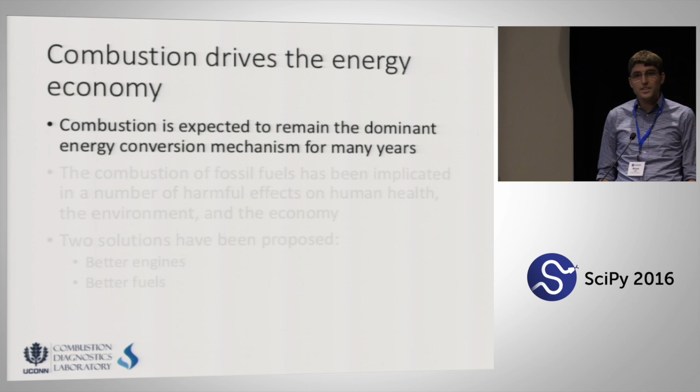So as a little bit of motivation, combustion really drives our energy economy. And to put some numbers to the pie chart that Kyle showed before, this is a bar graph with data from the EIA, the federal agency, the Energy Information Administration. And the blue bars are data from 2013, and the orange bars are projections out to 2040. And the first three categories there, petroleum, natural gas, and coal, are all combustion. So you can see that that makes up that 85% number that was mentioned before.

And even out to 2040, and these projections might have shifted a little bit. I think 2013 was just at the very start of the natural gas boom. So these projections might have shifted a little bit by now. But even all the way out to 2040, there's still a huge dependence on combustion as an energy conversion method. And I'd also like to point out that combustion can also be used renewably a little bit, especially if we use something like biomass to do the combustion. So then we can have a net zero gain in something like carbon dioxide over the life cycle of growing a plant, making the fuel out of it, and then burning it at the end.

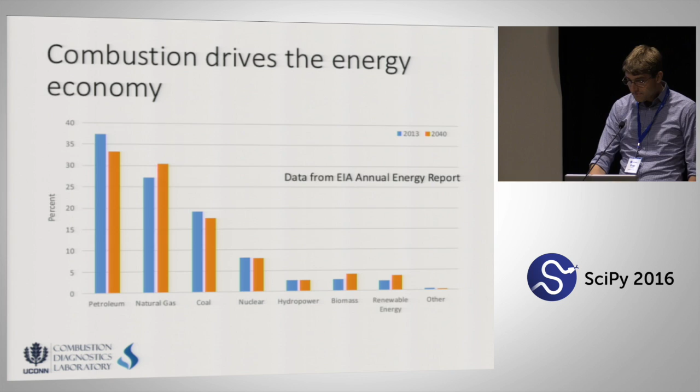That said, most of what we use right now is that petroleum, natural gas, coal, and the combustion of these fossil fuels is really not very good for us, for our health, for the environment in general, and even for the economy. Wild swings in the price of oil that we saw, I think, last year really affected a lot of companies. So we have two ways to get around using these fossil fuels, or at least ameliorating some of the difficulties that we have with them. We can design better engines, and we can design better fuels.

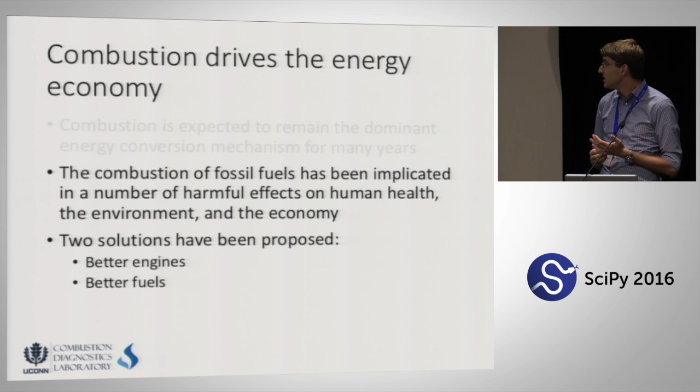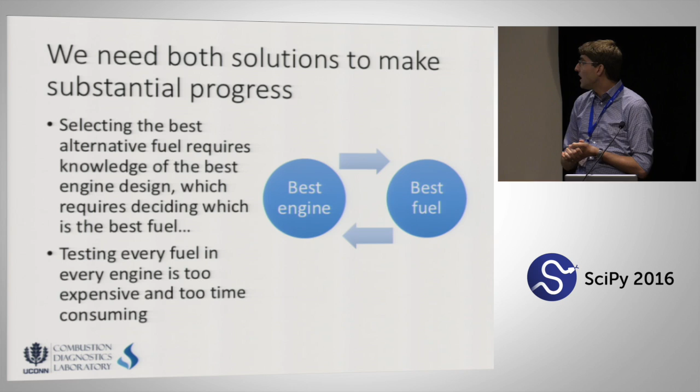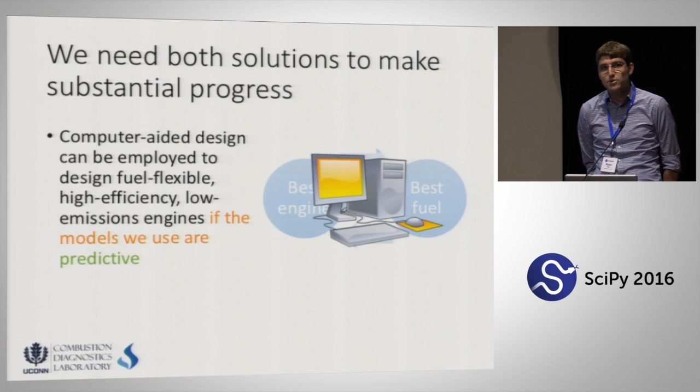The problem is that if we want to design a good engine to use a better fuel, we need to pick that fuel. But to pick the fuel, we need to know what kind of engine we're designing for. So you can't really do that experimentally. It's a factorial problem, right? So the number of possibilities just explodes very quickly. And so the solution to this is to use a computer-aided design. And the goal with the computer-aided design is to design fuel-flexible, high-efficiency, low emissions engines. But the key is that the models that we use have to be predictive. And so this is something that Kyle talked about a little bit, is how do we make sure that the models that we're using are accurate and predictive.

One of the ways that we do that is by conducting a lot of experiments in a more fundamental sense. Whereas real engines are pretty complicated. They are affected by things like taking in gas mixtures and injecting fuel, exhausting those out, mixing the fuel and the air together in an inhomogeneous way, fluid mechanics. We often take a power output from an engine, if we're trying to do something useful with it, like drive a car. So all of that makes it really complicated to model, and you would typically need to use something like Fluent CFD or OpenFOAM CFD with millions of mesh cells, and it takes weeks and weeks and weeks to run that kind of a simulation.

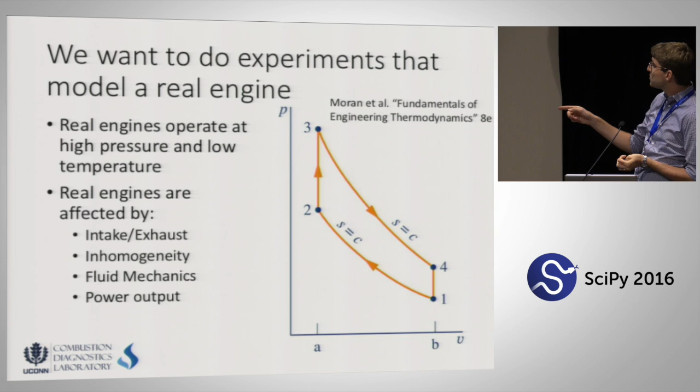From 2 to 3, we have ignition that's occurring. Piston's not moving during that part, ideally. 3 to 4 is when we take the power output, and 4 to 1 is when we exhaust the gases out of the cylinder. So what we want to do is take out process 3 to 4 and 4 to 1. We don't care about that. We just want to simplify this as much as we can. We want to study process 1 to 2, the compression, and 2 to 3, the ignition.

And the machine that I've used to do that, there are plenty of ways that we can do that, but the machine that I've used in my research is this one called a rapid compression machine. So I got a question before about the title of my talk, if rapid compression was about data or something like that. No, it's this thing that looks kind of like an engine. This is about 8 feet long to give you a sense of scale. So if I were to lay down next to it, it'd be a little taller than me even still. And the business end of it is in the reaction chamber.

And so in the reaction chamber, we fill in a pre-mixed mixture, so it's already homogeneous, of the fuel in the air. So we don't have to worry about any inhomogeneities in the gas mixture that we're studying. And we've done our best in designing this to minimize the effects of fluid mechanics. So now we don't have to try and solve the Navier-Stokes equations in addition to all the other chemistry equations that we're trying to solve as well.

The best thing about this machine is that it makes it relatively simple to get to similar thermodynamic conditions in terms of pressure and temperature that are present in a real engine, that is high pressure and relatively low temperatures. And so then the hydraulic cylinder, the pneumatic chamber, and the driving air tank are just details of the experiment, basically how we control it. So a typical experiment would look something like this. On the x-axis is time, and on the y-axis is pressure.

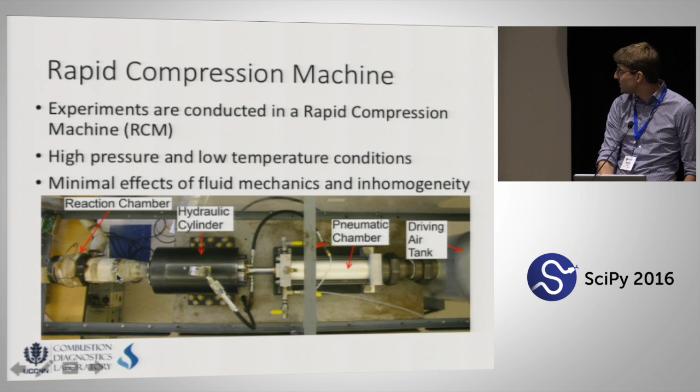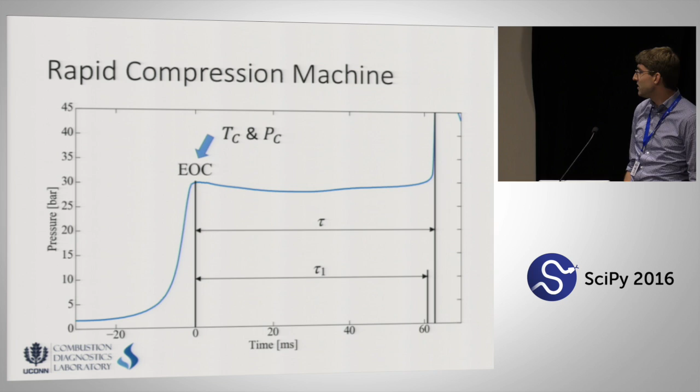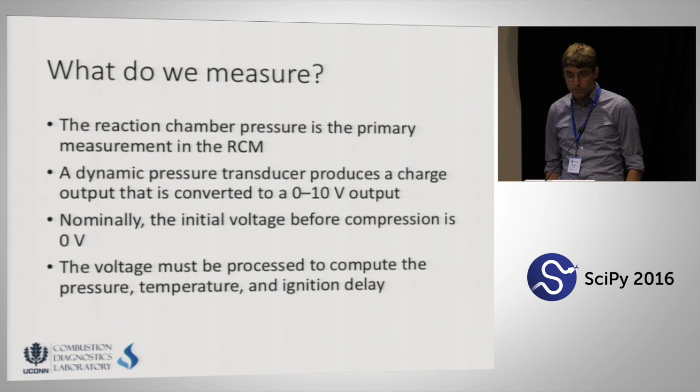Basically what we measure from the RCM, our objective is to get to the pressure, the temperature, and the ignition delays. Those are the three things that we want. What we actually measure is a voltage output. So we have a dynamic pressure transducer on the reaction chamber that measures the change in pressure from the initial condition to whatever the final condition is, and converts it to a voltage, a 0 to 10 volt output. Nominally, the initial voltage is 0, right? We're measuring a change in pressure. And we need to process this voltage somehow to compute the pressure, the temperature, and the ignition delay.

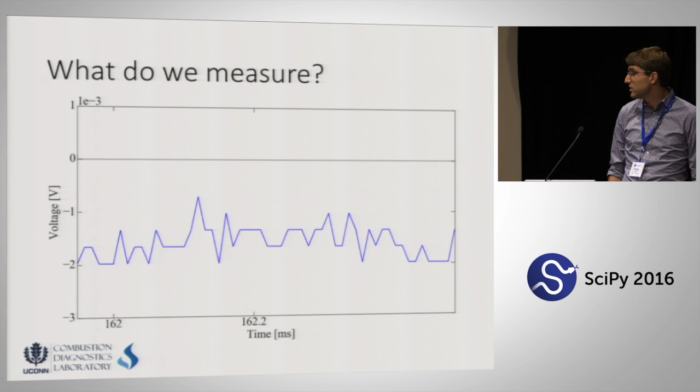The other thing that we can see, if we zoom in on the time before compression starts, is that that gray line there is the 0 volt line, and we'd expect at least the mean of the voltage to be through that gray line, but it's not. So there's some offset from our initial condition. So we need to correct for that as well. So some will call these problems, I call them engineering opportunities.

Again, the signal is noisy, gives us an error in the PC. There's an offset in the initial voltage, gives us an error in the initial pressure, which leads to actually a very strong error in the computation of the temperature at the end of compression. I did a little bit of an uncertainty analysis on that, and it turns out that the thing that most strongly affects the error in temperature is the initial pressure that you use.

So what I want to do is write a data analysis framework that anyone operating RCMs can use. And I want to write in Python because I like Python. I started in MATLAB, and I wanted to distribute my code, and I realized that everyone would need licenses for MATLAB, and so I converted everything to Python. I want to enable reproducible analysis across researchers. I want to document all my design choices for how I filter the data and correct for any errors that are present. And I also want to have a citable open source publication of the code.

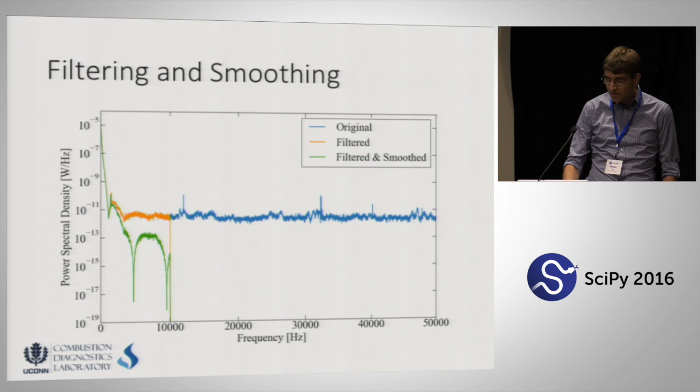There we go. And after that, I also smoothed the signal using a moving average algorithm with a particular window width. These are typical values that I've seen for the experiments that I've done. It doesn't necessarily mean that they will apply to every experiment, and that's actually one of the improvements that I'd like to make: how do I better pick a cutoff frequency and a window width for the filtering and smoothing.

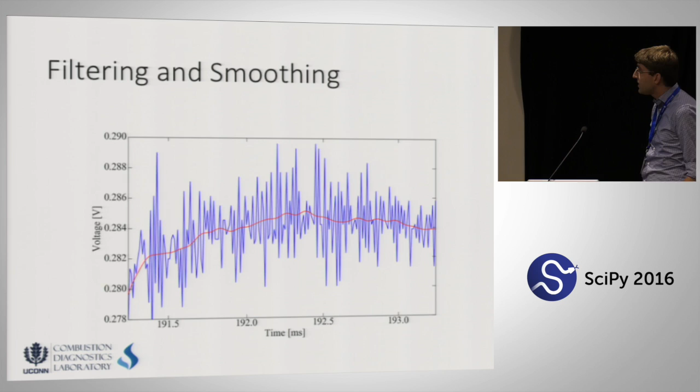In any case, if I plot the red line, which is the filtered and smoothed signal, overlaid on the blue line, which is the raw voltage trace, you can see, at least qualitatively, we haven't done anything bad to the data. We haven't shifted that big peak in the voltage by a whole lot and messed up our data. So we're doing pretty good with that. And if I zoom in again on this region around the end of compression, you can see with the red line, the filtered and smoothed data, and the blue line, the original raw data, that I'm doing a lot better at getting rid of some of that noise.

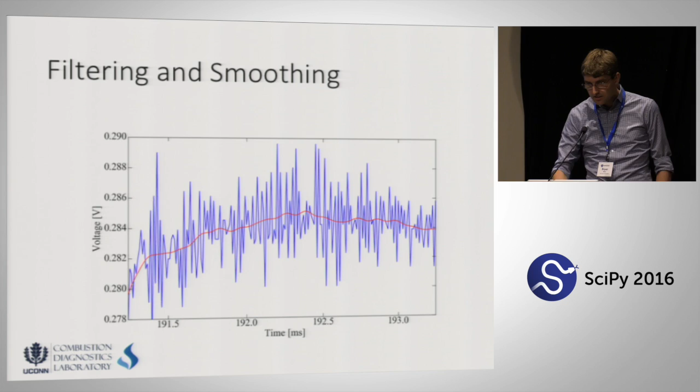So after I filter and smooth the data, I need to correct the offset that I found in the voltage. So in this plot, the blue is the original raw signal, and now the orange is the filtered and smoothed signal.

And the way that I corrected for the offset is just to subtract the initial voltage. Take the voltage at the very first data point and subtract it out. And that gives me, you can see in the green line, a line that's at least approximately centered around the nominal voltage of 0 volts. So that's a good start as well.

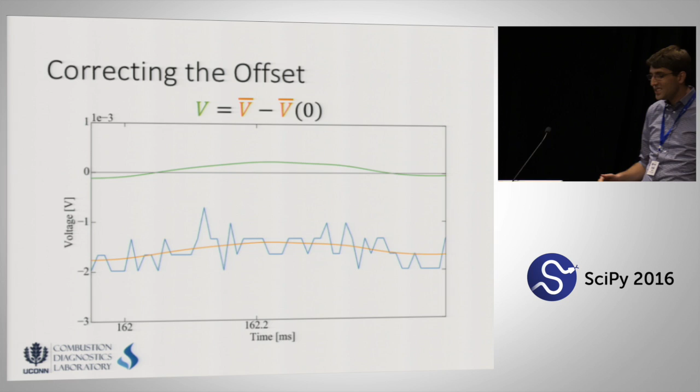This is probably the hardest thing that I have to do with this software because the signal is still noisy, even though I've filtered and smoothed it. There's still some noise in the signal. And taking the derivative of that signal increases the noise in the derivative. So it's difficult for me to pick out peaks in the derivative signal in between the two bigger peaks. And so that's the bug I mentioned that I had on my first pressure trace plot. In this one, it's been corrected, and it seems to be working properly.

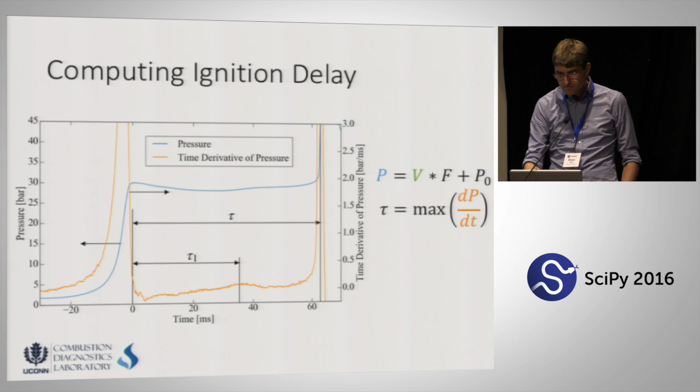Finally, the last bit that we have to do, we're still missing the temperature. We need to compute the temperature at the end of compression. And to compute that, we need to model some of the facility effects that are happening. So you can see as the compression happens, the pressure is increasing. After the end of compression, the pressure decreases slightly. In reality, that turns out to be due to heat transfer from the reactants into the reactor walls.

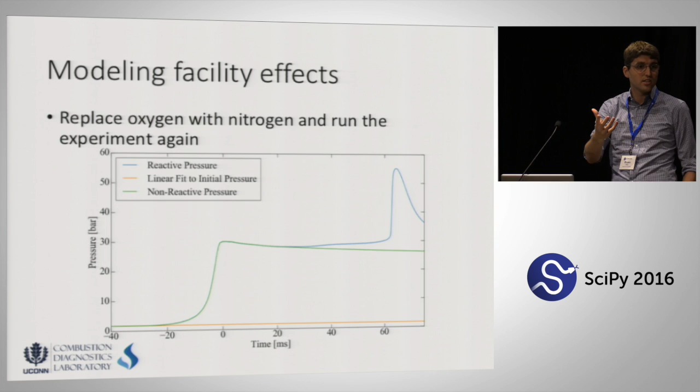But we actually model the whole process as adiabatic, undergoing an adiabatic volume compression and then an adiabatic volume expansion. And that turns out to give us pretty good results after we solve the first law of thermodynamics, the law of conservation of energy. Then we can calculate the temperature at the end of compression, and we're within about 5 Kelvin of some experimental measurements. 5 out of 700 to 1,000 Kelvin. So we're doing pretty good at estimating the temperature this way. And of course, there's some uncertainty on the experimental measurements as well.

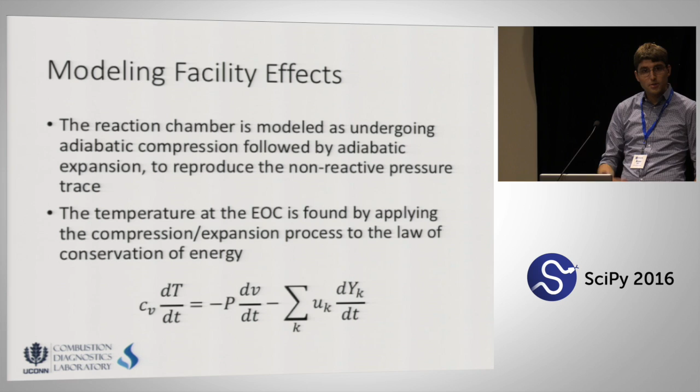So UConnRCMPy handles, through its various classes and methods, all of these functions: the filtering and smoothing, the offset correction, calculation of pressure trace, derivative, ignition delay, and also the calculation of the temperature at the end of compression. And so I've tried to make it as modular as possible because every experimentalist that I know has their own data format that they prefer. Some want tab-separated text files, some prefer comma-separated text files, or HDF5, or some other format.

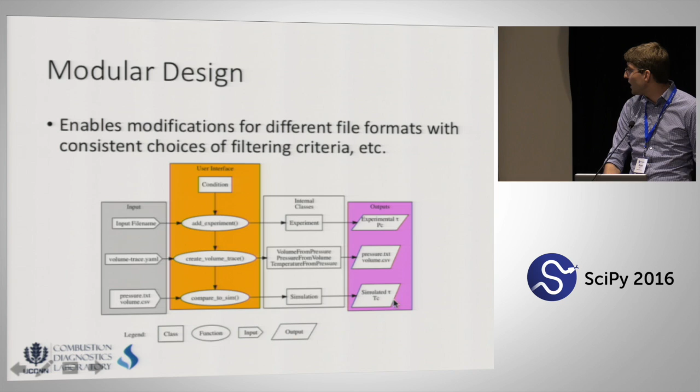So I tried to make this as modular as possible so that other experimenters can go in and replace the parts that they don't need with what they actually are planning to use. And so the main user interface to UConnRCMPy is shown in the orange box here in the middle. Whoops, go back. And all the inputs the user is required to give are in the gray box on the left side. Internal classes that the user might need to replace are in the white box. And then the outputs that I want, the experimental ignition delay, the pressure at the end of compression, some file outputs, and finally the temperature at the end of compression are there.

So of course, this presentation would not be complete without shouting out all the people whose software I use. An interesting fact: I use SciPy for my filtering, and it turns out that the FFT convolve method from SciPy was about 100 times faster than the NumPy convolve method. So I thought that was kind of interesting. For my data sets, I'm not saying this is generalizable, but I thought that was kind of interesting.

I am using Cantera as well to manage all of the thermodynamic information about the reactor. All my plots are generated by Matplotlib, and I do have documentation available on the web, which is generated by Sphinx. I've done the best that I can to document all my classes and functions so that if people need to try and replace them, they can figure out what the outputs from those need to be.

So I think I'll have some time now. I can go through a very quick demo. This software is really designed to be used in a very interactive manner. The user is going to be running an experiment and then processing their data and going back and forth from the experimental machine into their computer. And so my preferred way of using this software is in a Jupyter notebook. You can also use something like Spyder, which is the IDE that looks like MATLAB. Again, I prefer the Jupyter notebook.

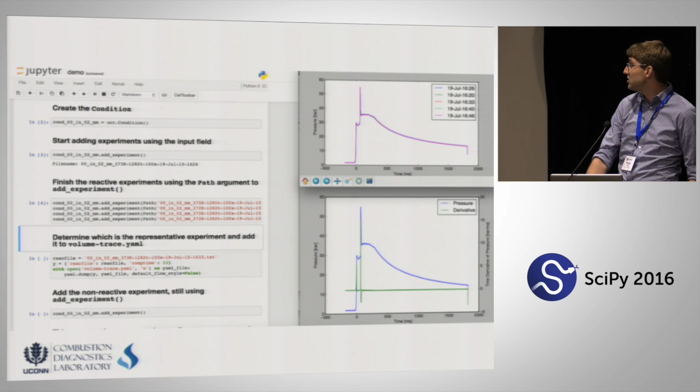So this lets me work with and look at my data as I'm processing it, as I'm collecting it, and make sure that nothing is going wrong with the experiment, and make sure that I'm at the correct conditions that I expect to be at. I also copy the data into a spreadsheet. I have an... automatically outputs the data onto the clipboard, and I copy it into a spreadsheet, again, so I can interact with it in real time and figure out what's going on in the experiment.

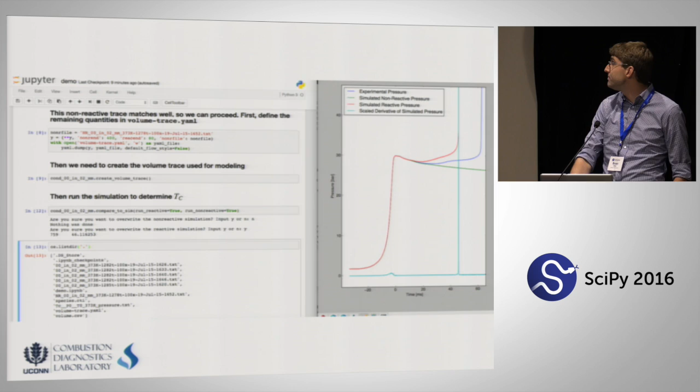In terms of future work for this, I mentioned I'd like to have automatic calculation of an optimal or several optimal low-pass filter cutoff frequencies, and also the moving average window width. That has all been done empirically by me and determined by comparison to my data. I'd also like to have some improved detection of the end of compression. We can introduce a little bit of uncertainty into the ignition delay times if we set the end of compression to be in not quite the right spot. So I'd like to improve my detection of that as well.

At the moment, I don't have any unit tests written for this because I'm a mechanical engineer and I was never trained in software engineering or anything like that. So that's on my to-do list. And then there's a couple other issues with the code that you can see on the issues page on GitHub.